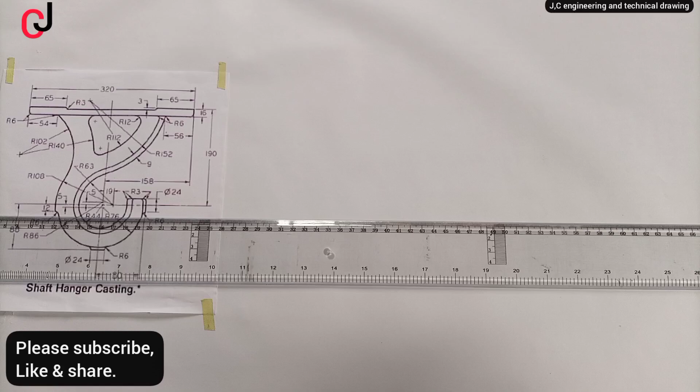Today we'll be drawing a shaft hanger casting using the principle of tangency.

The first thing we do is draw a horizontal line. From our diagram, we have a major horizontal line and then a vertical line, so we'll draw the horizontal line first, then the vertical line. Now you can see they intersect at a point. We'll call this point 0.

Now from our diagram, we'll locate the points. There are 3 points on our vertical line over here: this is 1, 2, and 3. They say this is 5 millimeter, 5 millimeter upward from point 0.

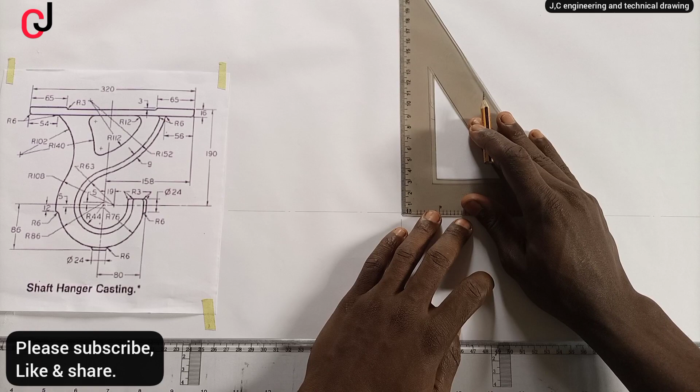So use a t-square, or just take your rule and pick 5 millimeter, indicate it to the point, then using your t-square mark out the point. We'll call this point 0,1. Also from our diagram, you can see there's a distance from point 0 downward, which is also 5 millimeter.

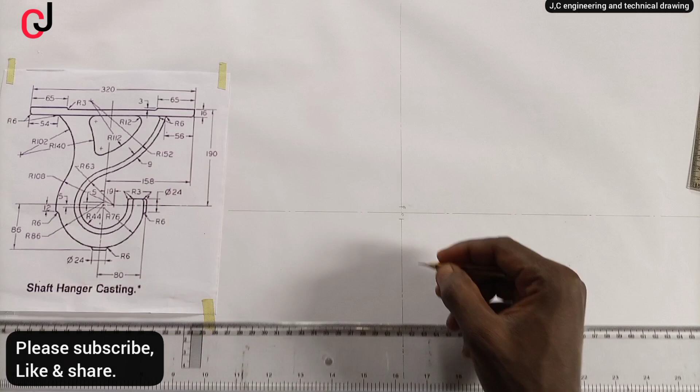Measure 5 millimeter downward, so pick 5 millimeter and indicate it to the point. Then using our t-square we'll mark out the point, and we'll call this point over here point 0,2.

So now we've succeeded in getting these 3 points: 1, 2, 3. The next point we're going to get is this: they say 19 millimeter from point 0 towards our right.

So pick 19 millimeter, and we'll mark it to the point, just give it a mark. I will call this point A, which is 19 millimeter from point 0.

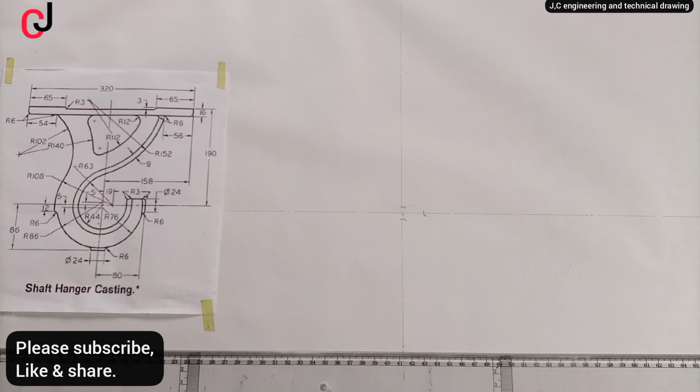The next thing we'll do, from our diagram, from this radius over here, you can see they said we should open our radius to 44 millimeter from point 0. This point 0 here is 0,2, this is 0,1. So we say 44 millimeter from point 0.

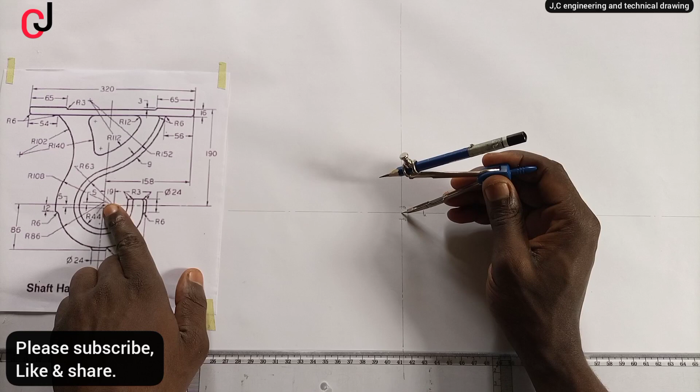So take 44 millimeter from point 0 using our compass. We've taken 44 millimeter from our rule using our compass, so place it at point 0, which is this point here, which is the 44 millimeter radius. So we draw a semicircle.

I'm just making it an outline so we can see properly. So you can see we've drawn a semicircle.

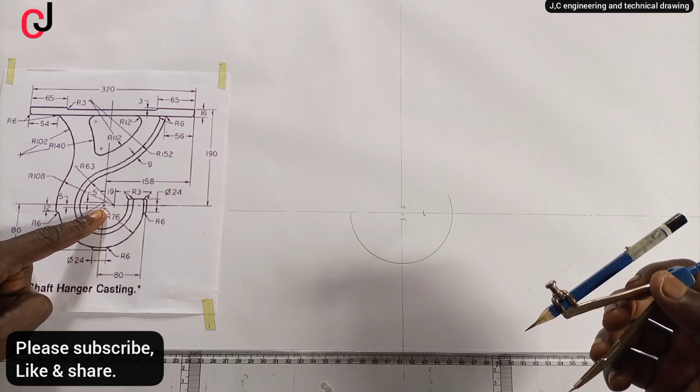The next thing is that we want to get this line also, this circle here. They said from point 0 to this portion is 76 millimeter radius. So open our compass to 76 millimeter and place the compass pin at point 02.

We've taken 76 millimeter from our rule and we'll place it at point 02, and then we'll draw a circle. Let me just extend this a little. You can see we've done with that.

The next thing we want to do is get this line. Now there's a line here going through to this point, and they said the thickness of this line is 9 millimeter from this arc, so it's 9 millimeter equidistant from each other for these circles.

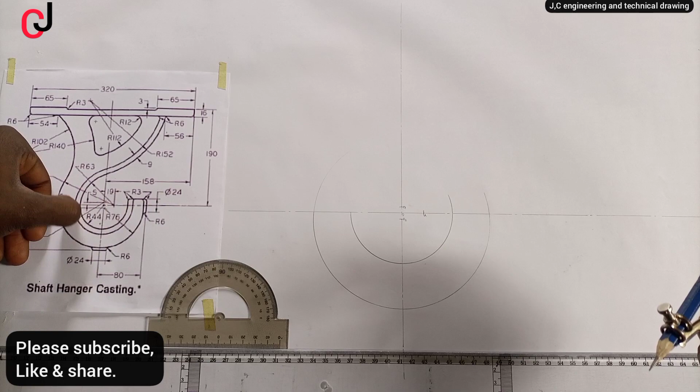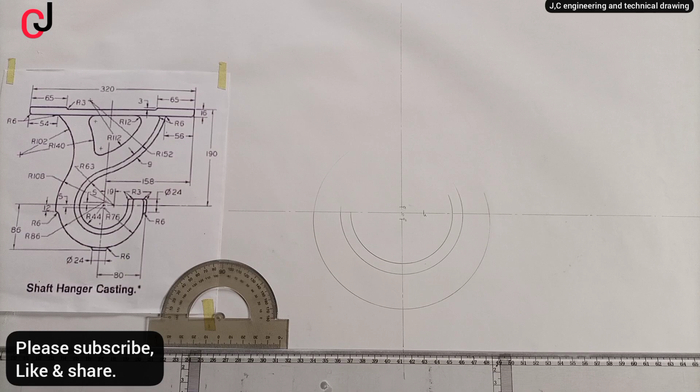So from point 0 here, our radius 44 millimeter, we'll add 9 millimeter, which gives us 53 millimeter. Use our compass, open it to 53 millimeter, place it at point 0 at this portion here, and then draw a semicircle. And then we'll do the same thing from point A.

Now we want to get this portion over here. From point A, which is 19 millimeter distance to point 0, we'll open our compass to radius 63 millimeter. So open to 63 millimeter using our ruler and compass.

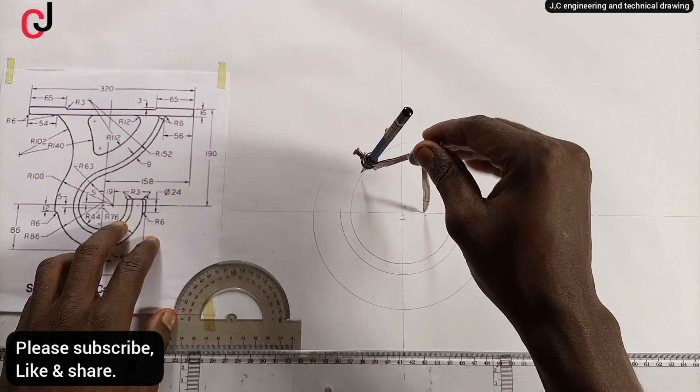So we've succeeded in picking 63 millimeter. We'll place our compass pin at point A, and then we'll progress. You can see that it moves exactly from point A towards this portion.

Now we've done this, which is 53 millimeter from point A. We're trying to get this portion, so open 63 millimeter radius from point A. You can see it progresses from where this radius 44 stops, and then all through to this point. Let me do it so you can see - it's perfectly done.

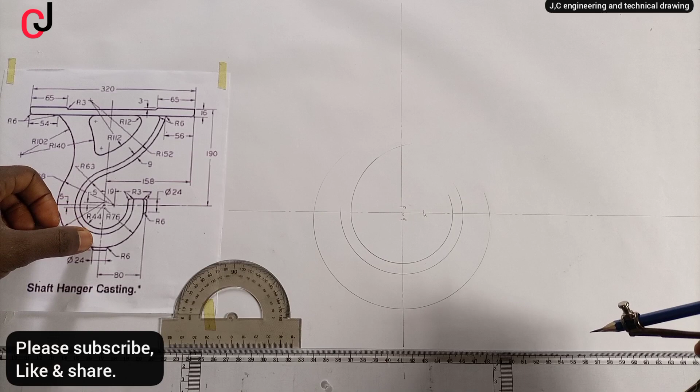We want to get this portion, this line. You can see there's an equidistant line, this progression. We know this is 9 millimeter, so we add 9 plus 63 millimeter radius, giving us 72 millimeter. Open our compass to 72 millimeter using our rule, place it at point A, and you can see that it progresses towards this portion.

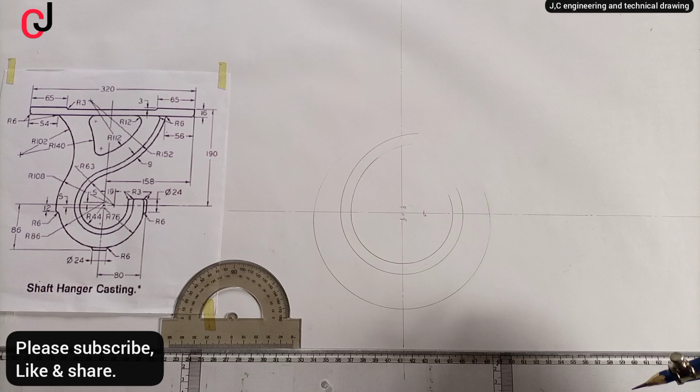Next we'll pick our distance from the vertical line, from point 0 upward, to be 190 millimeter. We measure 190 millimeter with a rule and mark a point, which is this. Using our t-square, we project the point to our left and also to our right, giving us a straight horizontal line. We've succeeded in measuring from point 0 to point B, which gives us a 190 millimeter radius.

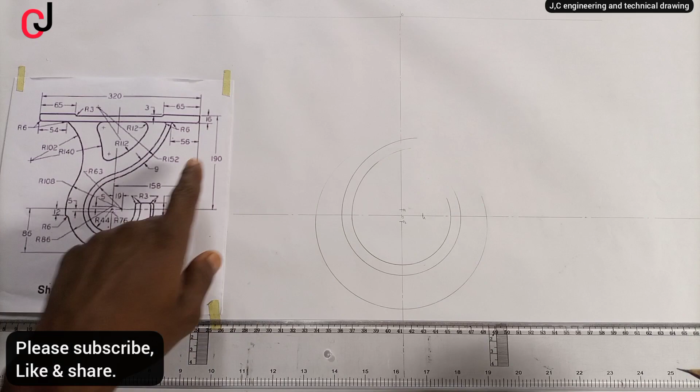Next, from our shaft hanger casting, the top over here is 16 millimeter wide. We pick 16 millimeter using our rule, succeeded in picking that, then from where we indicate our points, we draw a straight line towards our left and also towards our right.

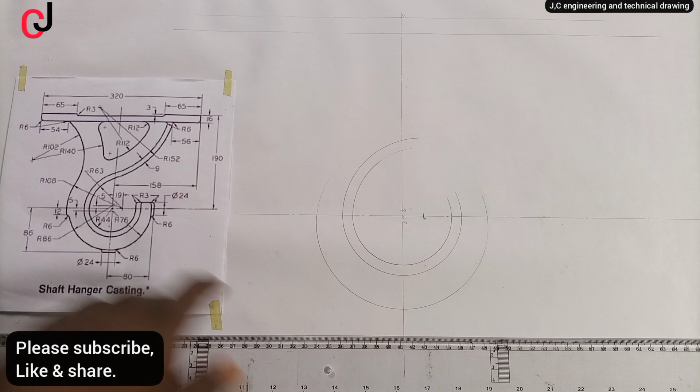Next, from our diagram we are told that from point 0 to the edge of this portion is 158 millimeter. So we measure 158 millimeter from point B, indicate the point, succeeding in picking 158 millimeter towards our right. Then we project the points upward.

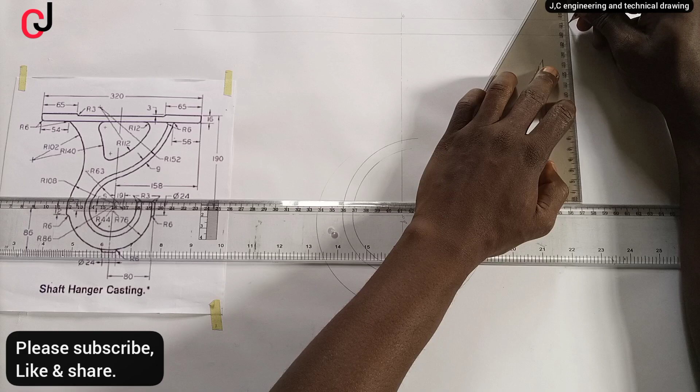Now you can see the portion here, we succeeded in getting that. There is a curve at the edge of this portion, indicated towards our left, which is 6 millimeter radius. So we open our compass to 6 millimeter radius and succeeded in taking that.

This is an angle 90, so we construct a tangential arc at angle 90. All we need to do is place our pin here, scribe an arc at the top and also at the line of our horizontal line over there. Let me erase this portion, it's a mistake.

Now using this point on our vertical line, scribe an arc. Using this portion also on our horizontal line, we bisect the arc. Now using the point of their intersection, we construct our arc still using radius 6. Draw your arc. So we succeeded in getting this arc.

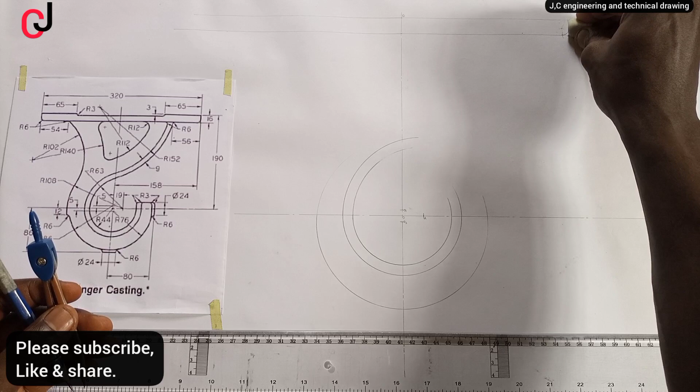Then you erase this portion a little, to dull the edges. Next, from your diagram we are told that we should measure 56 millimeter to our left from this portion here. So pick 56 millimeter, succeeded in picking 56 millimeter from this portion towards this portion.

So what we need to do, we'll just mark it out with a set square, the 56 millimeter. Just give it a little mark so we can see properly, and we'll call that point A1.

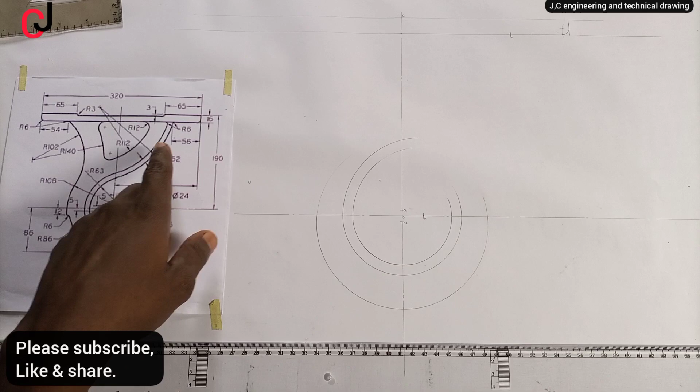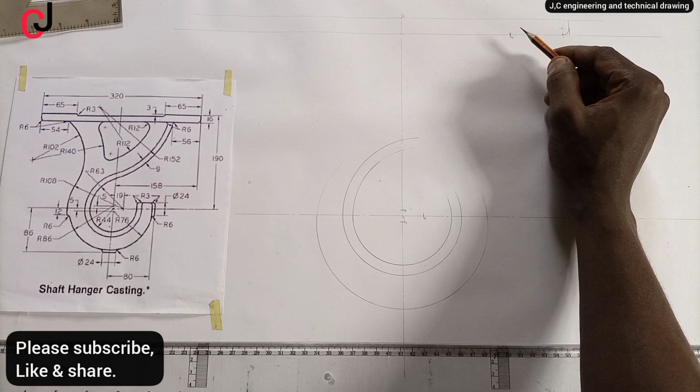Having our point A1 given to us at this portion here, we have our arc touching points A1 and also progressing, touching this our arc here, which is 63 millimeter radius from point A1. You can see there's a radius of 152 millimeter from point A1 touching the circumference of this circle here, of 63 millimeter radius. So one of the laws, the principle of tangency: when two circles touch each other externally, you add their radii together.

Now from our diagram, we've gotten point A, and there is an arc touching point A and also touching the circumference of the 63 millimeter radius circle. First we want to get this point so we know where to draw our arc. So at point A1, we place a radius of 152 millimeter, which we've already taken with the compass, then we scribe an arc.

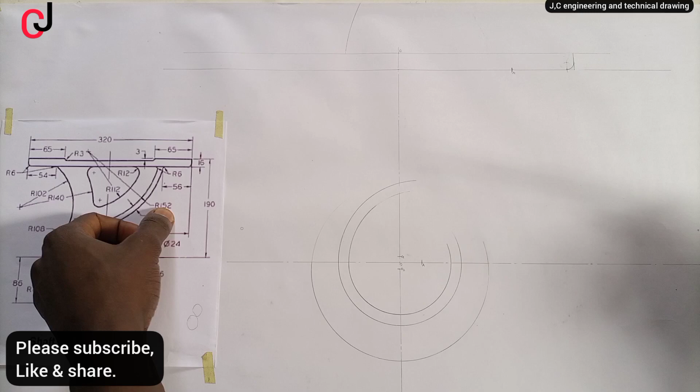You can see we've gotten our arc. Then the next thing we need to do: I told you when circles touch each other externally, we add. So we add this radius here, 152 millimeter, which is touching the 63 millimeter radius externally. You can see it towards this portion here. So you can see this.

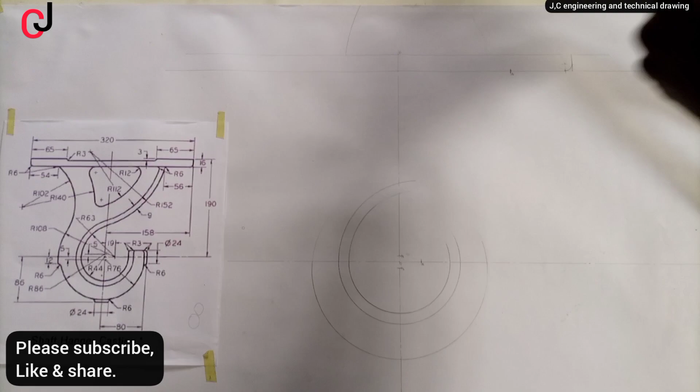So you add 63 millimeter plus 152 millimeter radius, which will give us 215 millimeters radius. It's actually a long radius, a very large distance. So you take your rule, since your compass cannot, then you extend your pencil, then you pick 215 millimeter radius. Then you can see that the radius 63 millimeter emerges from point A, which is this portion here.

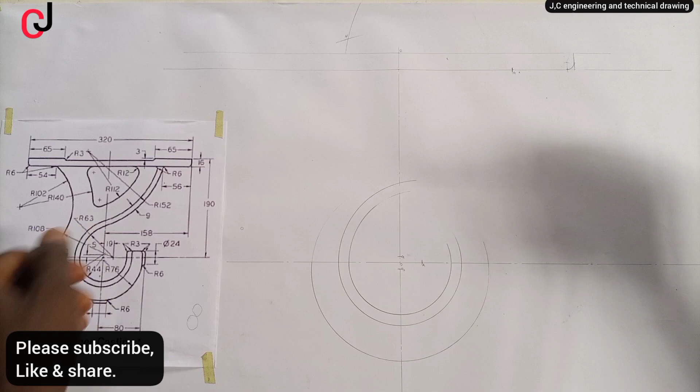So you place your compass pin at point A and then you bisect the arc here, and we'll call that point X. Now also you open your compass to 152 millimeter and you place it at point X to get this arc. So we succeeded in taking our radius 152 millimeter. We'll place it at point X, and then we'll draw our arc.

You can see it's touching our circle here, this arc of 63 millimeter radius. And then progressing it there, you can see it's also touching point A1. So we'll make it an outline. So you can see we've succeeded in getting this arc. We also want to get this arc that is coming here to hit this line.

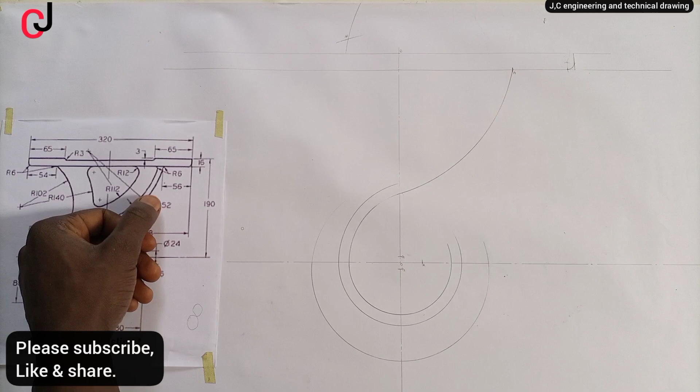So what we need to do is, since it's found inside the radius 152 millimeters, we'll just minus 9 millimeter from 152 millimeter. So when we minus 9 millimeter from 152 millimeter, that will give us 143 millimeter as radius. So place our compass at point X

over here, and you can see it's touching this. So project, progress the arc so that it can hit this line. You can see, so we succeeded in getting that. So the next thing we're going to do is that we have a radius here of 6 millimeter. There's a curve having a radius of 6 millimeter.

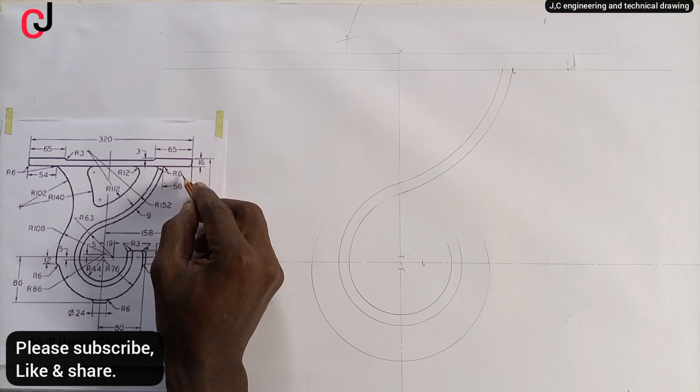So all we need to do is, don't be confused, we'll just set our compass to 6 millimeter. So we'll pick 6 millimeter radius. Now there's a curve here of 6 millimeter radius. I want to get that curve on our diagram here. So remember what we're doing here. This is the right procedure.

So from your vertical line, you measure 6 millimeter radius. At this 6, you put a point, and then you project that point towards your right. Make sure you get it very clearly, very perfectly. And you can see I've projected my point. Then the next thing I'm going to do is look for the portion which, when I bisect this, I can place the 6 millimeter radius to get a curve here, not a full circle, just a curve

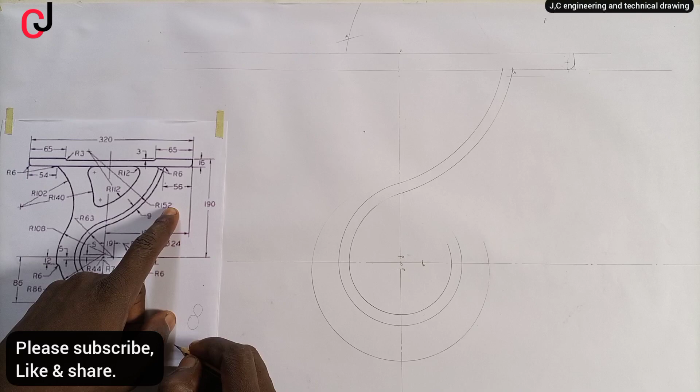that will be showing. So I'll add 152 millimeter plus 6, which will give us 158 millimeter. So we've succeeded in picking 158 millimeter. So place our compass pin at point X, and then we'll bisect the arc. Now you can see that we've gotten the intersection at this point there. Let us call that point X1. So we've gotten the point at which we can place our compass to radius 6.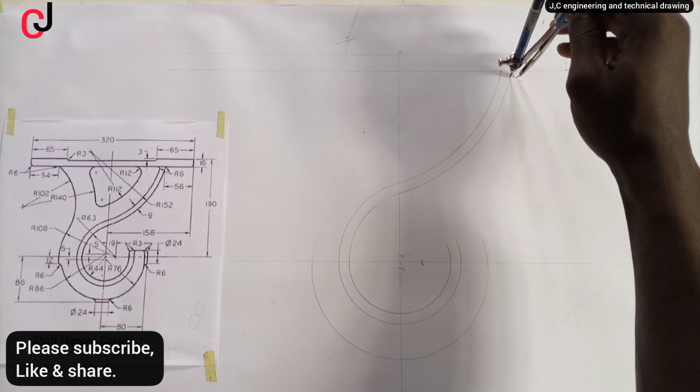So we'll pick 6 millimeter radius using our compass. Now I'm placing it at the point of intersection, point X1, this 6 millimeter radius. Then we'll draw our arc over here, touching this. You can see it's touching this perfectly. So that your work will not look dirty, you can erase this portion a little, so that when progressing, your arc will be neat and nice.

So from here, from our point X1, we'll draw our arc. Now you see, this is it. You can see the arc perfectly. Now let me show you something over here. Let me put this construction line.

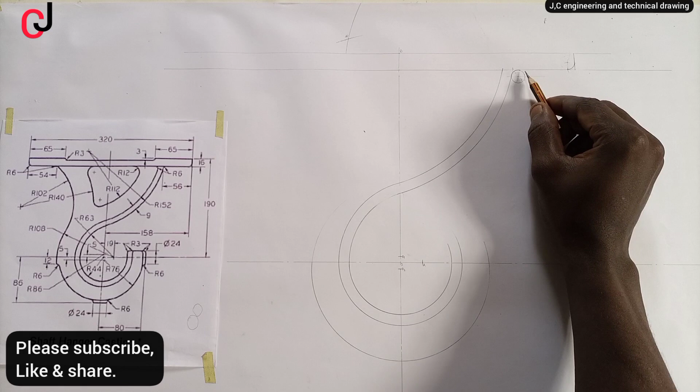Now you can see that there's a perfect circle touching these two portions together. Now whenever you use any method, people get it wrong. They use some method, and then just know that whenever you're using this, your circle must touch this and this, and it must be a perfect circle, because they just erase that portion. So let me just leave it for clarity purposes, so that you can understand it better.

So we'll outline this portion that needs to be outlined perfectly. Now you can see we've outlined this. In the diagram, your circle is not showing, it's just an arc that will be showing. Then the next thing we're going to do is that, now we know that this is 158 millimeter towards our left, that we got to this point. Now I want to know where we get this point from.

So this is the total distance of the base of the top, the apex of the hanger. So 320 minus 158 millimeter to get this portion from point 0 to this portion here, which will give us 162 millimeter. 320 millimeter minus 158 millimeter will give you 162 millimeters radius. So from point B here, this is B or 0, we're going to measure 162 millimeter towards our left.

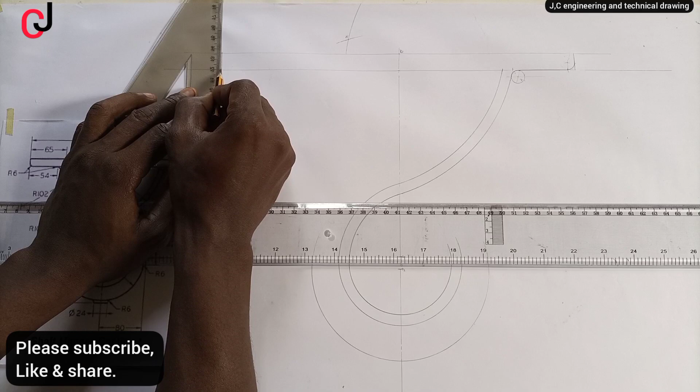So we succeeded in getting that. This is the portion here. So project it downward to hit the down line. You can see we're having this, and also we have a curve there which is 6 millimeter radius. So we'll do the same thing over here. Now this method only works when you are to construct a tangent arc on angle 90 degree. Some people get it wrong and use this method for every other curve, which is wrong. So pick 6 millimeter radius.

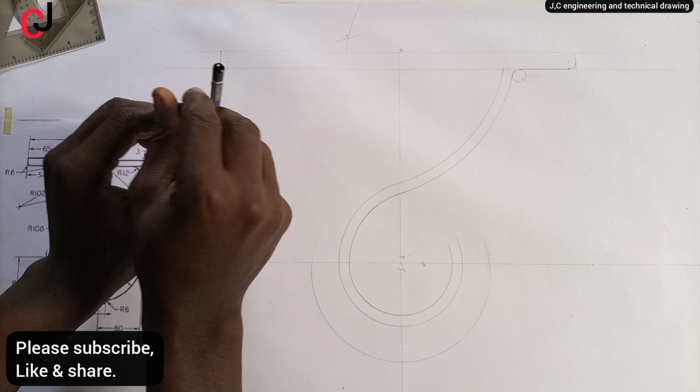So this is like an angle 90 degree. So we place it at this point, cut an arc on the vertical line, and then also on the horizontal. Then using the point on the horizontal, you describe an arc, and using the point on the vertical here, you bisect the arc. Now at the point of the intersection, you draw your arc. So we've gotten the curve.

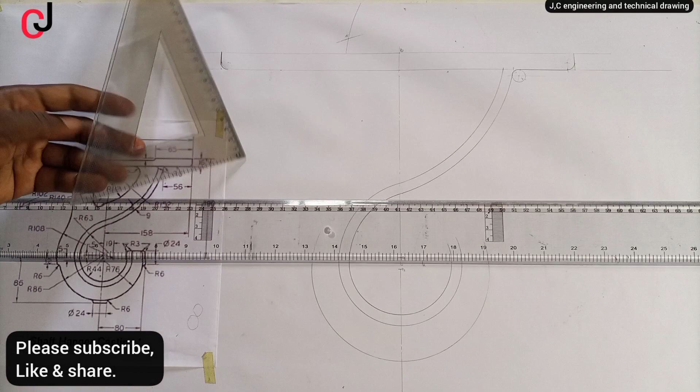The next thing we'll do, from our diagram you can see, is measure 54 millimeter radius from our point here where we got our straight horizontal line. Measure 54 millimeter towards our right. Then indicate the point. I will mark that point over there, so that we can see a visible point. So now we'll call this point here point A2. Now we've succeeded in getting point A2.

From our diagram, from point A2, there's a radius of 102 millimeter touching point A2, and also touching a radius of 108 millimeter from point A, which is this. Remember, we got this arc here, this semicircle, using radius 76 from point 02. Now there's also another circle here, which is 86 millimeter radius from point 01. So we'll open our compass to 86 millimeter radius, place it at point 01, and then draw our arc.

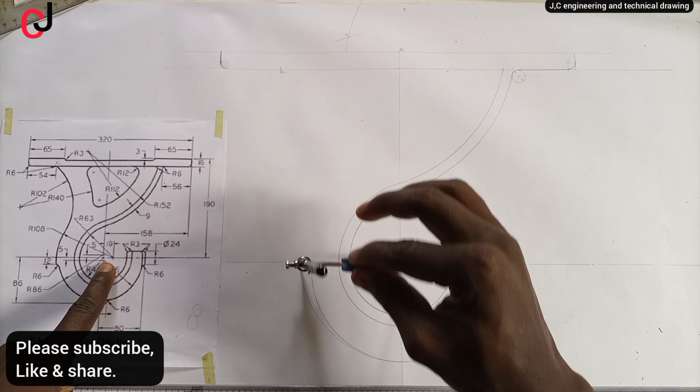Now you see that 86 progresses from where 76 stopped. Now this portion here is no longer needed from the diagram. You can see each circle is touching each other in the diagram. So we'll erase this portion. Now we've gotten this portion perfectly.

The next thing we're going to do is open our radius to 108 millimeter. Then we'll place it at point A. This is 108 millimeter at point A. Bring it here, then scribe an arc. Now you can see that this portion here needs an arc, a radius that will cut this portion together. So what we need to do is that

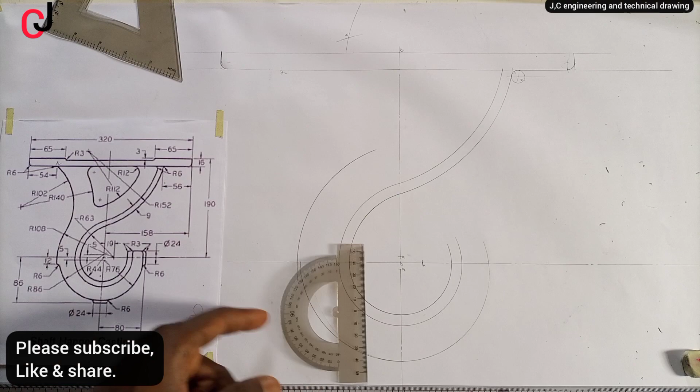we'll measure 12 millimeter downward using our rule. This is 12 millimeter. Then you project the point of 12 millimeter downward towards this portion. You can see. So you are free to erase what is inside. Erase this portion inside.

So we're having a tip of a straight line and also a circumference of a circle, a circle here touching this portion externally to have a curve. So what we need to do is measure 86 millimeter and add it to the 6 millimeter radius. So 86 plus 6 millimeter radius, which is this curve, will give us 92 millimeter as radius.

Place our compass pin at point 01. Scribe an arc. Now from the tip of our circle here, you can see there's a tip here. We'll open our compass to radius 6.

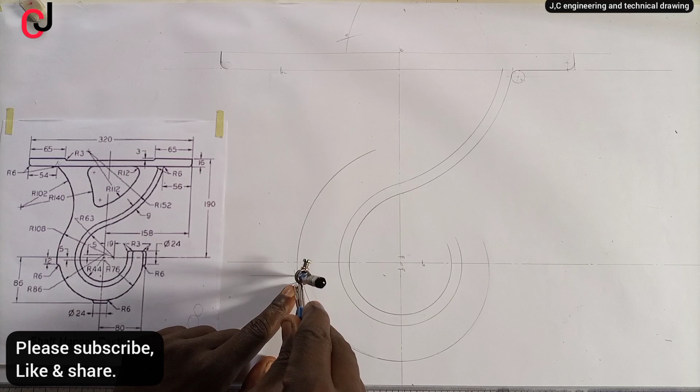Open our compass to radius 6. So we've taken radius 6, place it at the tip of this circle here. Then we'll bisect this arc. Now using the same radius 6 at the point of intersection, you join using the point of intersection with the same 6 mm radius which we've gotten over here. So you are free to erase this to make your diagram look neater.

So we've gotten this. The next step is that there's a radius touching point A2 and touching the circumference of 108 millimeter radius. So open our compass to 102 millimeters radius. Place it at point A and scribe an arc over here. You can see my arc.

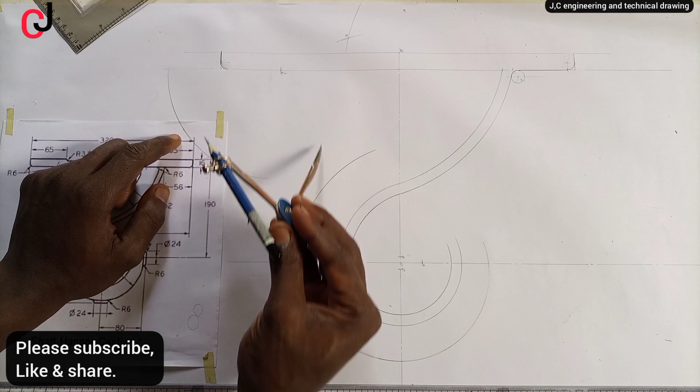Now I want to bisect this arc so that we can get the circle touching this portion here. So we'll add 108 millimeter plus 102 millimeter radius, which will give us 210 millimeter. This is 108 millimeter starting from point A here, now touching this arc of 102 millimeter. So when you join, you add 108 millimeter plus 102 millimeter. That will give us 210 millimeter.

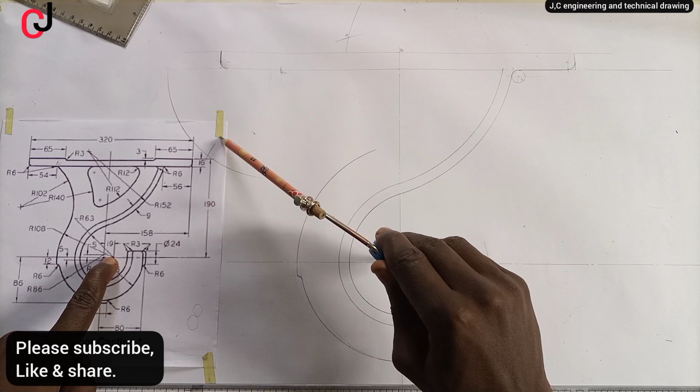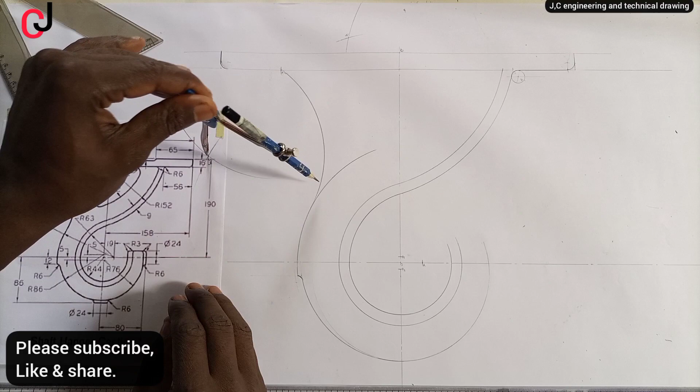So pick 210 using our compass. Place our compass pin at point A here. Then we'll bisect the arc. I'll call the point of their intersection point Y. Now using point Y, we'll open our compass to radius 102 millimeter. Using point Y as the point of intersection, we'll draw an arc starting from here, hitting point A2.

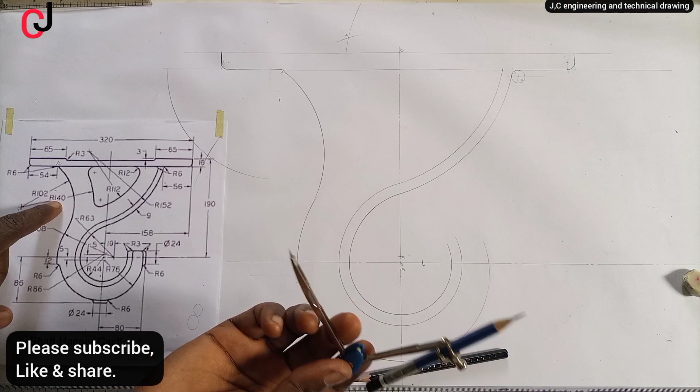So we're free to erase this portion of our hanger casting. And from our diagram, you can see this arc here, which is 140 millimeter radius. This point here is called point Y on our diagram. So we'll pick 140 millimeter radius, place it at point Y, and then describe an arc.

Which is this. Now you can see this arc over here is given to us as 112 millimeter. So we'll pick 112 millimeter using our compass and our rule. 112 millimeter. Place the compass pin at point X, and then we'll construct an arc. Now we can erase this portion. You can see that our diagram is coming out gradually.

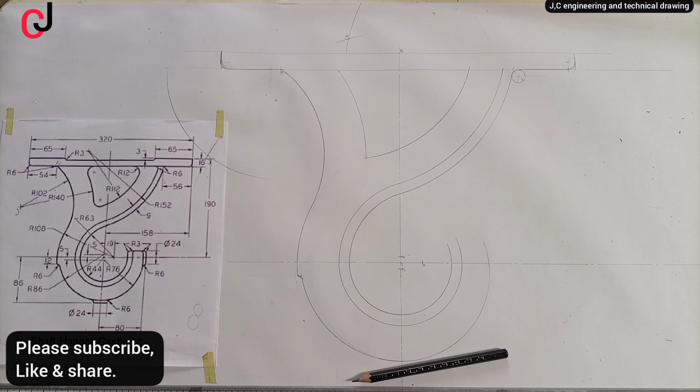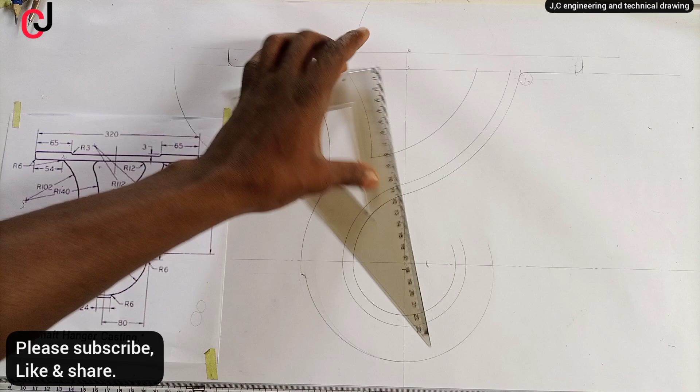So we should place a circle over here with a radius of 12 millimeter, so that we'll have this curve of 12 millimeter radius at this portion. We'll call this point B1 and measure 12 millimeter from point B1 here. So pick 12 millimeter: 10, 11, 12, and then we'll draw a straight construction line here. This is the right method to use so you can get your perfect circle there.

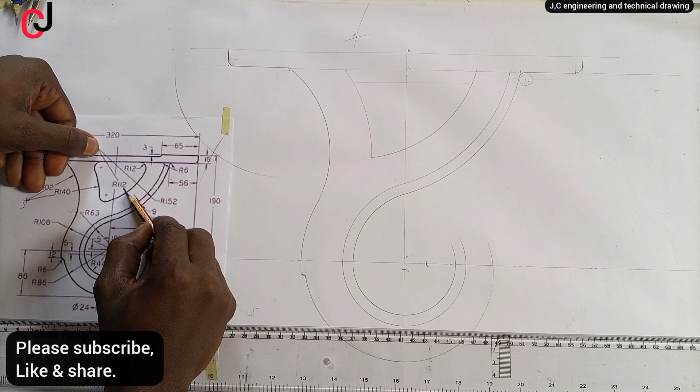The next thing: from point X here, you discover there's a radius of 112 millimeter. When the circles touch each other internally, we are going to minus. So we minus 12 millimeter from 112 millimeter so that we can get the arc at which you can get this circle. 112 minus 12 gives us 100 millimeter radius. So pick 100 millimeter with our rule.

Then we'll place it at point X, and then we'll bisect the arc. Now at the point of intersection, we'll open our compass to 12 millimeter radius.

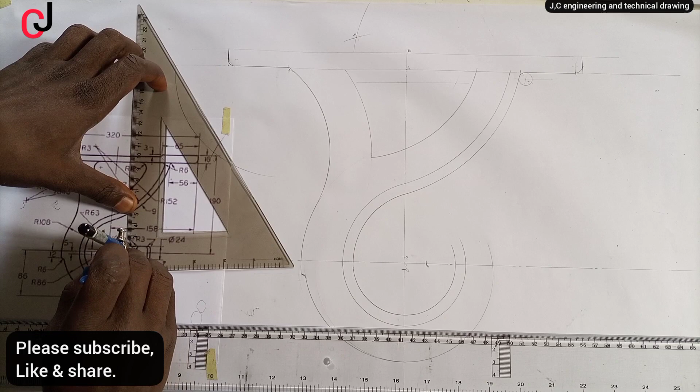And then you open your compass pin to 12 millimeter radius. Place your compass pin at the point of the intersection, and then you can draw your arc. And to show you that this is the right process, let me just make the circle complete with the construction line. You can see this. Now you can see that this is a construction line and this is the circle.

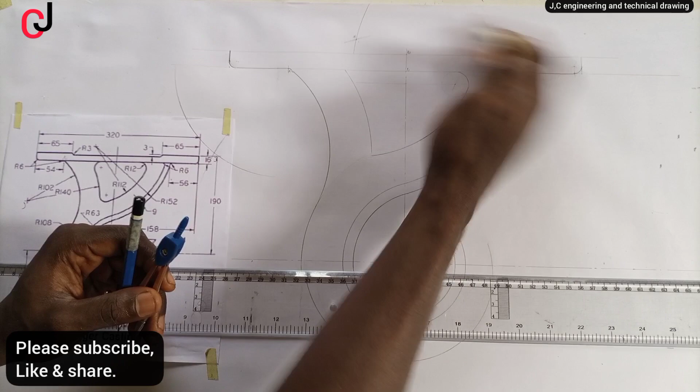So you erase this portion to your rule just to make the tip neat. So you repeat the same procedure here. So we'll want to get the same circle here. So all we need to do is add 140 millimeter radius plus 12 millimeter radius, which will give us 152 millimeter. So open the compass to 152 millimeter, place it at point Y here, which is also this portion on the diagram.

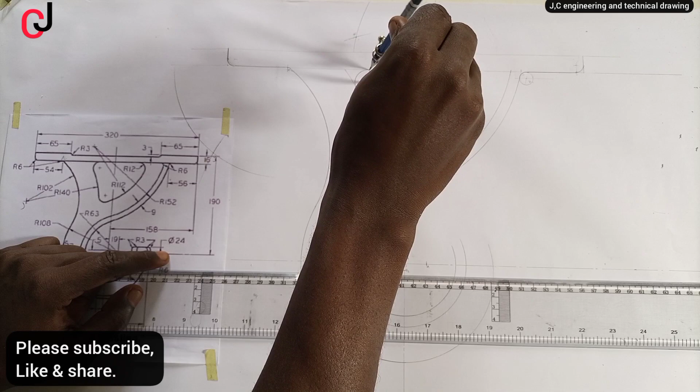So at point Y, we'll bisect our line. Then we'll open our compass to 12 millimeter radius. So we succeeded in taking 12 millimeters radius. This is 12. So place it at the point of the intersection, and then we'll draw an arc. And so that you can see properly, you draw this as a construction line. You can see. So I've done getting the curve, so we can erase this portion.

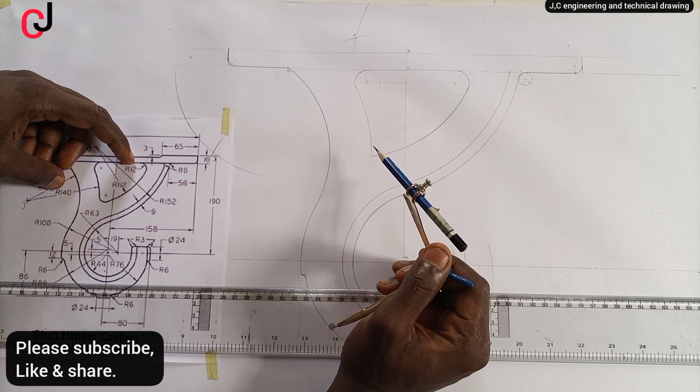So we'll do the last step, which is this. Now this is another method entirely we're going to be using when circles touch each other externally and also internally at this portion. Now from this, the circle here is touching this arc externally, so we're going to add 140 millimeter radius plus 12 millimeter radius, which will give us 152 millimeter. So pick 152 millimeter on the compass, place it at point Y, and then we'll scribe an arc.

So the next thing is that at this arc here, the circle is touching it internally. You can see when the circle is here, this is what I mean. At this portion it is touching externally, while at this portion it is touching internally. So when circles touch each other internally, we subtract. So subtract 12 millimeter radius from 112 millimeter, which will give us 100 millimeter. So open a compass to 100 millimeter radius, after we subtracted 12 from 112 millimeter radius.

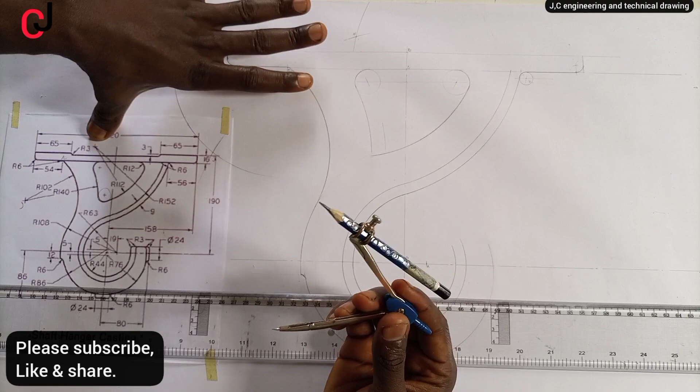So place a compass pin at point X, which is this, then we'll bisect the arc. Now using the point of the intersection, we'll open our compass to radius 12 millimeter. So we've opened to 12 millimeter radius, we'll place it at the point of the intersection, and then we'll draw our arc first. You can see our arc is touching, and then we are free to draw a circle lightly. So we can erase this portion here, which is this.

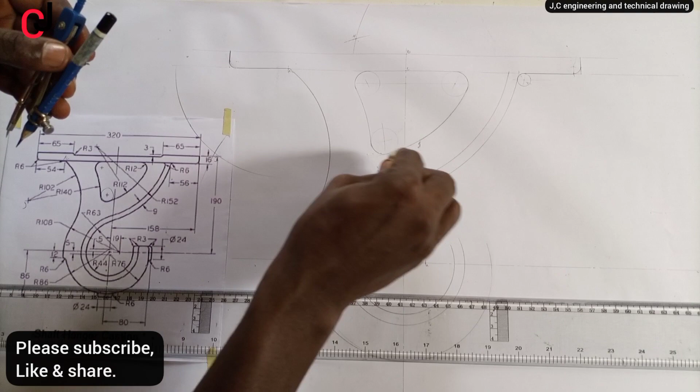And then we are free to outline the top with our pencil. You can see we've outlined neatly, but we're not done yet because we have this top. Now from our diagram, they say we should measure 65 millimeter from this edge. So this is 65 millimeter. Then we'll indicate the point, and then we'll project the point downward.

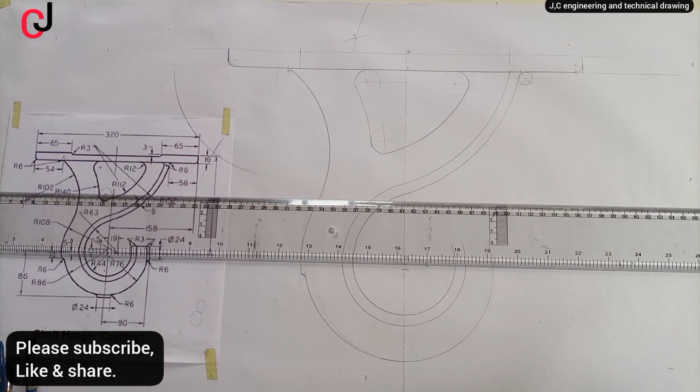Project the points downward. So this is it here, and also measure 65 millimeter from the edge of this, and then we'll indicate the point. Then we'll project that point downward also. Then from our projected line, we should measure 3 millimeter. Indicate the point over here, and then we'll project this out to hit this line also.

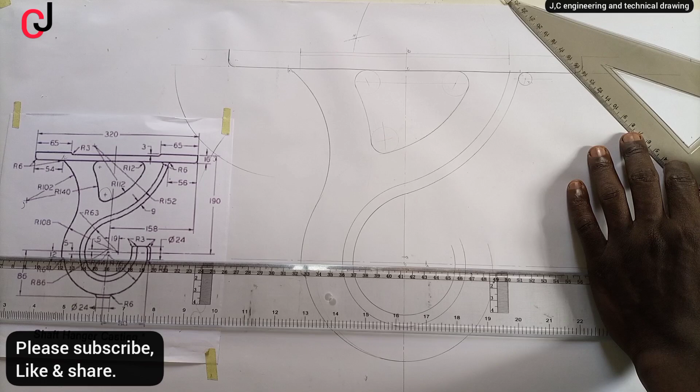Then the next thing is that we have a radius here of 3 millimeter, which is here and here. The curve is 3 millimeter radius. So pick 3 millimeter radius with our compass, and scribe 3 here. Using this portion, scribe an arc. Using this portion, we'll bisect the arc, and then at the point of the intersection, we'll draw a curve.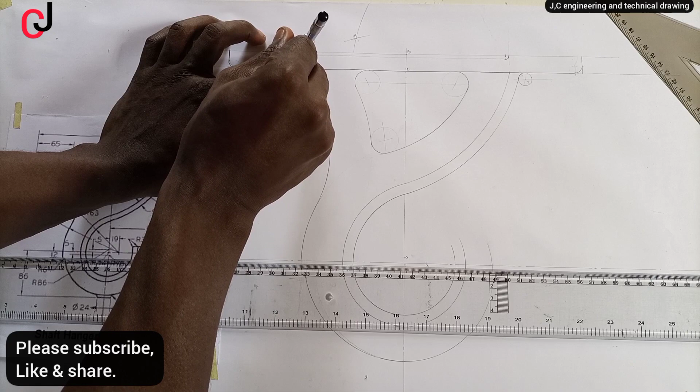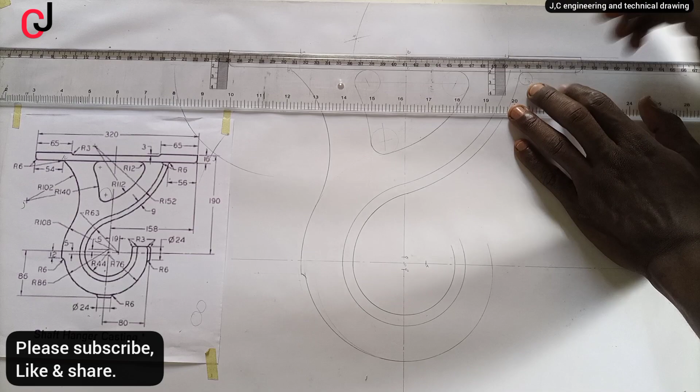Now repeat the same procedure. This is 3 mm already, so we are repeating the same procedure we did. Now at the point of the intersection, we'll construct our arc. You see, we're done with that. Then we'll outline. We're outlining. So outline this portion also. And that is it. So we can erase this portion to bring out the object more clearly. So we're done with the top portion.

So the next thing is that we'll focus on this portion next. Now from point 0, we'll measure 12 mm upward. Then we'll draw a straight line, cutting each of these circles' arcs. This portion, so we're free to erase this. And then we'll measure another 12 mm downward.

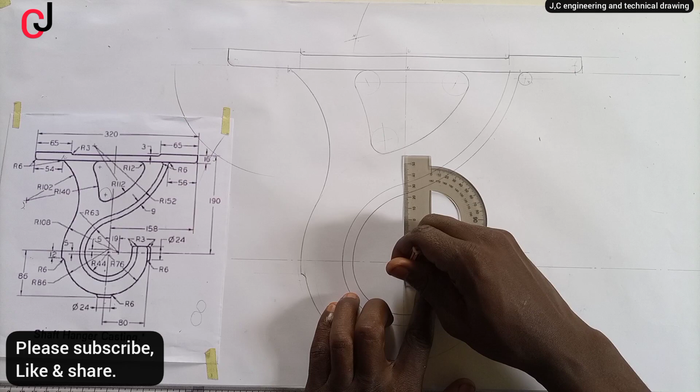Indicate the point, and then we'll project the point towards here. Now if you check, here is 24 mm, so 12 up, 12 down, giving us a total diameter of what? 24 mm.

So now they say that each of these will have a circle of a radius of 3 mm radius. And here also we have a radius of 6, 6. And then for us to get the total distance of this portion here, we should measure 80 mm from our vertical line. So let me just use this as my reference line. I have a reference line already there, so I'll just measure 80 mm from point 0 to my right. 80 mm, which is this.

Then I'll project my line upward, and then I'm free to erase the extension path. Then you can see over there. Now we're having a curve here of 3 mm radius. This is 3, this is 3, this is 3. So open our compass to 3 mm radius.

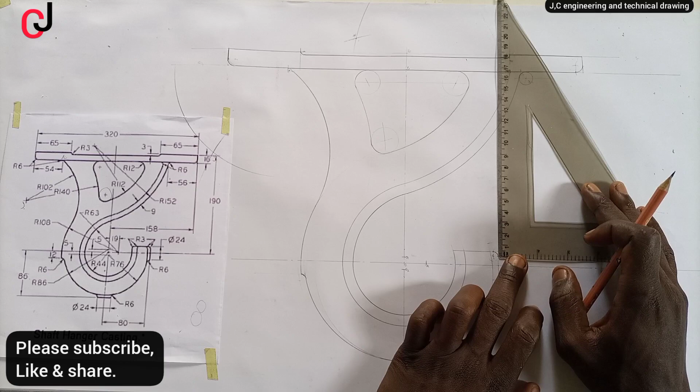So the next thing is that we want to get this curve here, 3 mm curve at this point, at this, and at this point. So all we need to do is use the same procedure which we did here, since this is the apex of the top of this, and we'll have a radius of 3 mm. So we'll measure 3 mm radius, and then this is it. We'll extend this portion with a construction line passing all through.

Now at this portion here, we need a curve, but we need the arc, the midpoint of this. So this circle here is 76 mm radius. We have also 3 mm, so 76 minus 3 will give us 73 mm as radius. So pick 73 mm as radius.

Placing our compass pin at point 0, we'll bisect the line here, and then we'll open our compass to 3 mm radius. So place our 3 mm radius at the point of the intersection here, and then we'll draw the arc. Now you can see we have the curve, and so that you know that it is the perfect method, you can just make this here. These are curves.

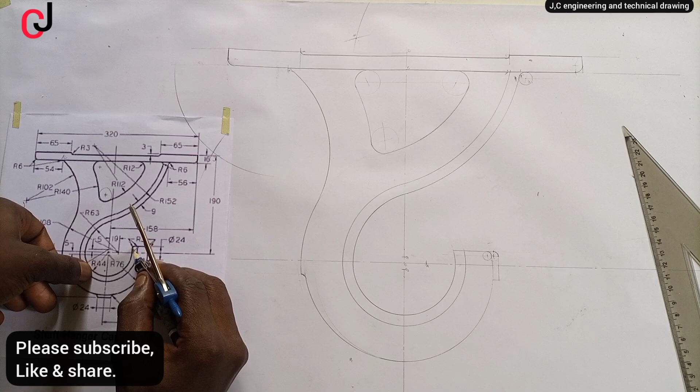This is what I mean. This is a radius 44 mm at this point here. Now we have a 3 mm radius here, and this is touching this arc externally. When circles touch each other externally, you add, so 3 mm radius plus 44 mm radius gives us 47 mm as radius. Our compass pin at point 0, we'll bisect this arc here,

and then we'll open our compass to 3 mm radius. Still taking 3 mm radius, using the point of the intersection, we'll draw our arc, because we still have another curve over there. So this is the arc. We're free to erase this portion, and then the last curve is at this portion.

You can recall this was 44 mm, but the distance between here to here is 9 mm, so we need a curve that will come over here. 44 plus 9 mm gives us 53 mm. Since this is touching this portion externally, we also add 3 mm to the 53 mm, which will give us 56 mm radius. So pick 56 mm radius from our rule.

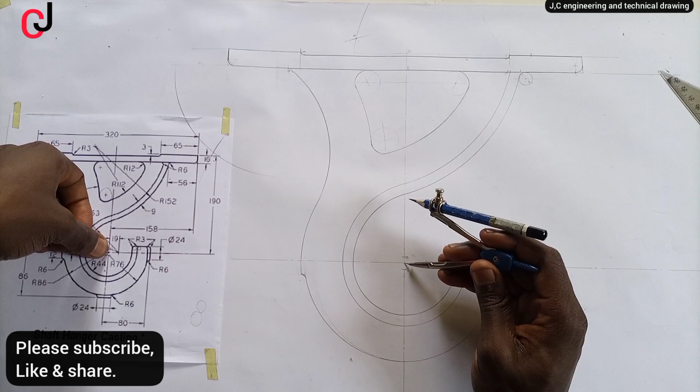So we succeeded in taking our 56 millimeter, placed it at point 0, and then bisected our line. We'll open our compass to a 3 millimeter radius. Now using the point of intersection, we've taken a 3 millimeter radius and we'll draw our arc. Then we're free to erase this extension, the sharp part of it.

If you like, it's your choice, you can just put this over there. So the next thing we'll do is outline the top to make it look neat. So we'll succeed in outlining the top. So also here at this portion, we'll have a curve of 6 millimeter radius.

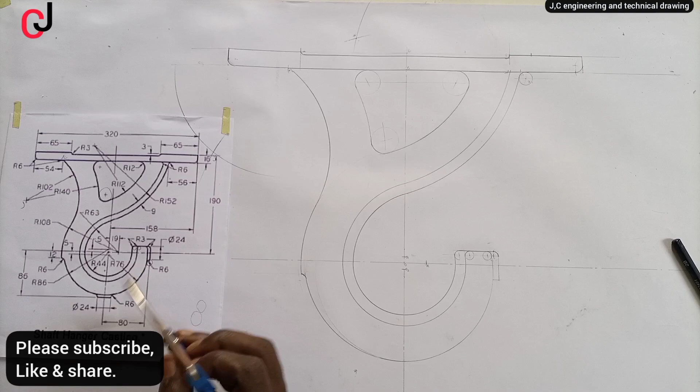Since it's touching this curve here, there's a circle here with a radius of 6 millimeter. It's touching this circle externally, so I'll add 6 plus 76, which will give me 82 millimeter. This 76 millimeter is touching this small circle of radius 6 millimeter externally, so we added it, which gave us 82 millimeter.

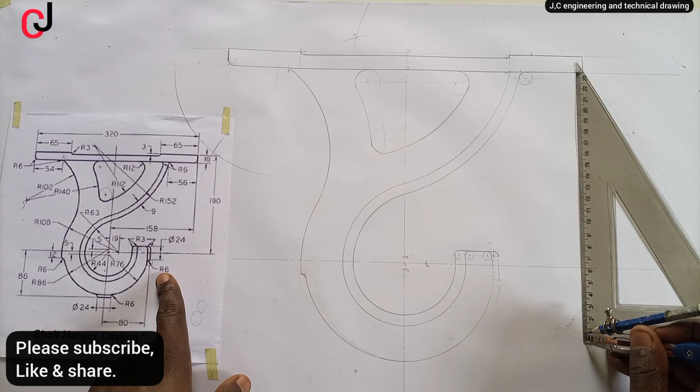So place a compass pin at point 02 and scribe an arc. Now open our compass to a radius of 6 millimeter. We succeeded in measuring 6 millimeter.

So place it at this point here, and then we'll bisect our arc at the point of intersection using the same 6 millimeter radius. Using 6 millimeter radius, we'll construct our arc, and then this is it.

But if you choose to, you can put this just to show that it's correct, and then we'll outline this portion over here, and then through this portion of the diagram. Then we're left with the last process, which is this here.

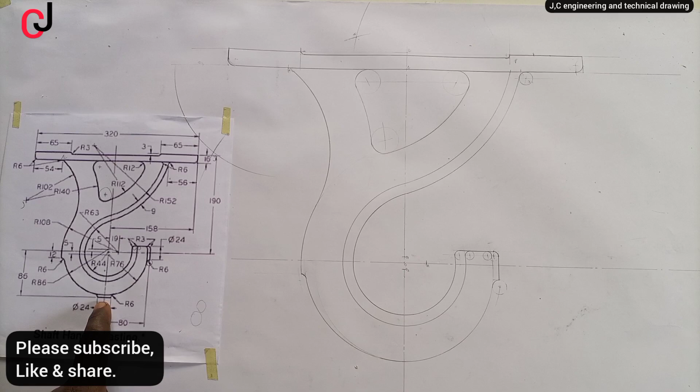Let's say from point 0 we should measure 86 millimeter downward. So pick 86 millimeter and then we indicate it to the points. Then we're free to draw a construction line.

Now they say the total diameter of this is given to us as 24 millimeter. So we do the same thing. We pick 12 millimeter to our left, indicate to the points, pick another 12 millimeter to our right, indicate with the point. Draw a straight line, project the line upward.

Now using radius 6, we have to find a curve this way and this way, which we've done, which is the same process as this and this. All you need to do is that at this portion here is 76, so you add 6 millimeter plus 76, you scribe an arc here.

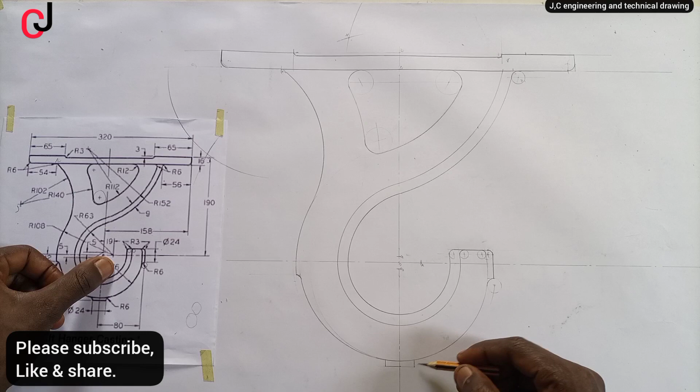And use 6 millimeter, you bisect. Okay, let me run it. So I said from this portion here, this is 76 millimeter. So I say 76 millimeter plus 6, which will give me 82 millimeters radius. So I'll pick 82 millimeter with my compass using my rule. 82 millimeters radius.

And then I'll place it at 0.02. You can see 0.02, and then I'll scribe an arc. I'll open my compass to radius 6 millimeter. And then I'll place it at the tip over here, and then I'll bisect my arc using the point of intersection using 6 millimeter radius. Then I'll draw my arc.

You can see I've drawn my arc over there. Similarly, I'll do the same stuff to this portion. You can see at this portion here it's still 76 before it leaves, so it's still 76. You can see my former arc, a little of it, it's not 76.

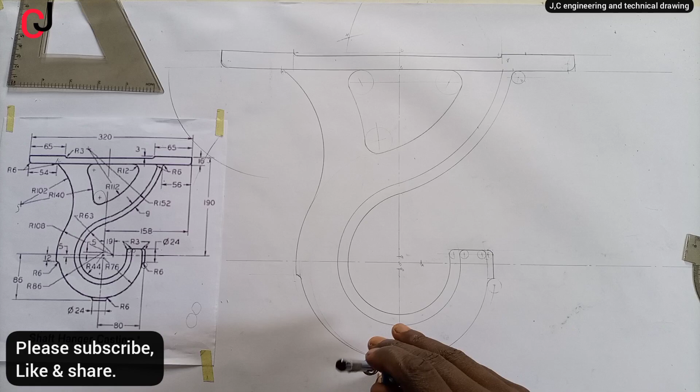So taking 6 millimeter radius here, I think this is 6 millimeter radius. I scribe my arc here, and then taking 82 millimeters radius, placing it at 0.02, which is this, I'll scribe the arc, you can see, and then I'll open my compass back to 6 millimeters radius.

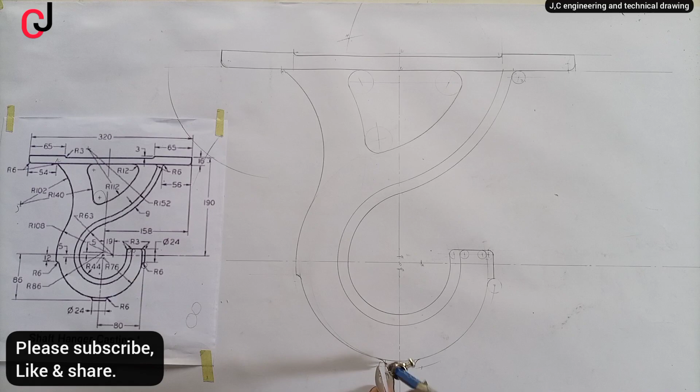I've picked my 6 millimeter radius, so this is now the point of intersection. I'll draw my arc. You can see I'm done with that. But if you want to see clearly for clarity purposes, you can just do this and this, like this. So I'm done with this. I can erase this portion a little, and then I'll outline the base.

And I'm done constructing my shaft hanger casting using the principle of tangency.